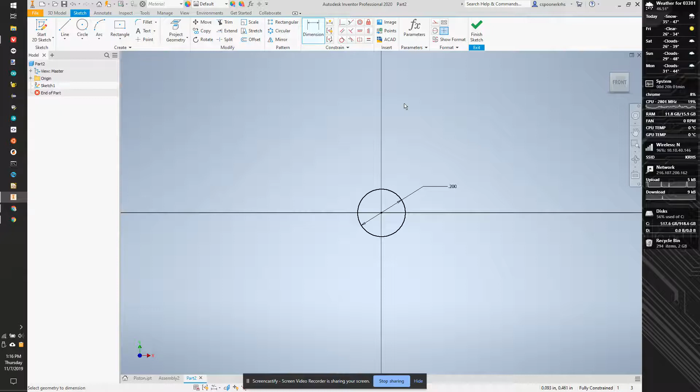I'm going to set this guy to 0.2. It's a fairly meaty piece of material, but it should be strong enough so we don't have to worry about it breaking. And I'm going to extrude this. I'm going to start by extruding it 1 inch. That might be too much, I'm not positive yet.

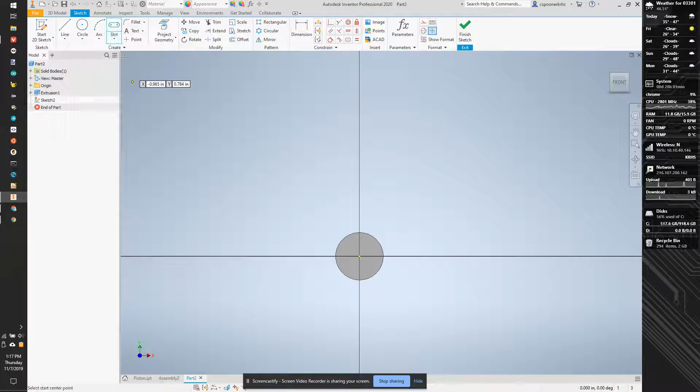I'm now going to start making the main lobes for the connecting rod. So this is going to be a center-to-center slot. I'm going to start here and go straight up. Nope, not center point slot, I want a center-to-center slot. I want to start here and go straight up, and I know it's going to click onto the edge of here. So this is in the same distance.

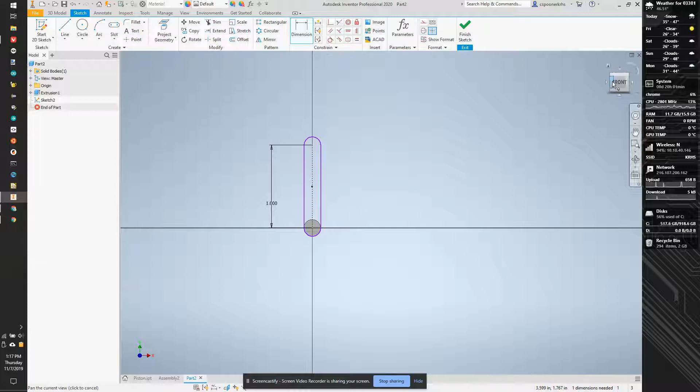And what we care about here is how far the pistons are going to go up and down. They're about 1 inch tall, so let's go with 1 inch. Actually, let's go 0.5 inches, so the total distance will be 1 inch.

And I'm going to make this 0.2. Actually, it makes it 0.2.

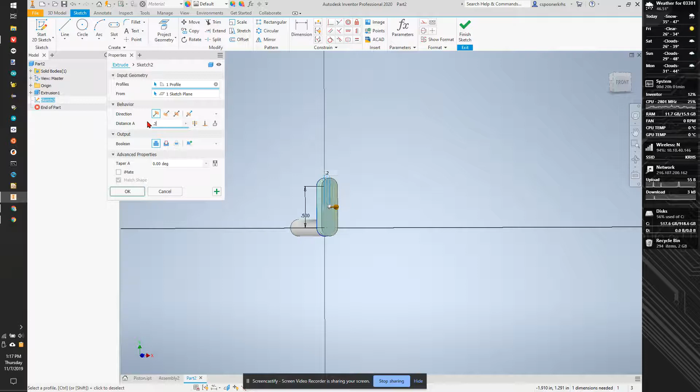And now the part, I have to go back and look at my assembly. We're going to go to inspect, measure, and I could usually just hit the M key. And I'm going to select from the XY plane to the XY plane.

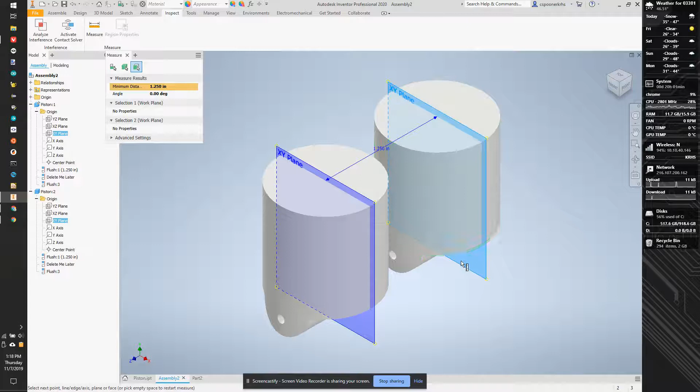It's 1.25 inches, so my center shaft from center to center is going to be 1.25. And the connecting rod, back to measure, I'm going to click from here to here, is 0.16.

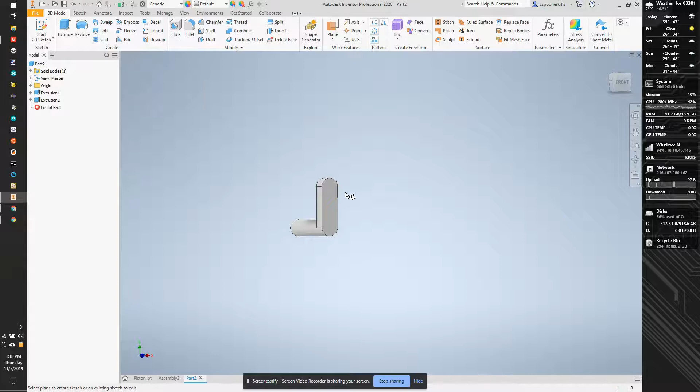So we're going to go over here and I'm going to extrude. I'm going to start a sketch on this shape here, and I'm going to draw a full-size circle here. I'm going to make sure it's connected onto here.

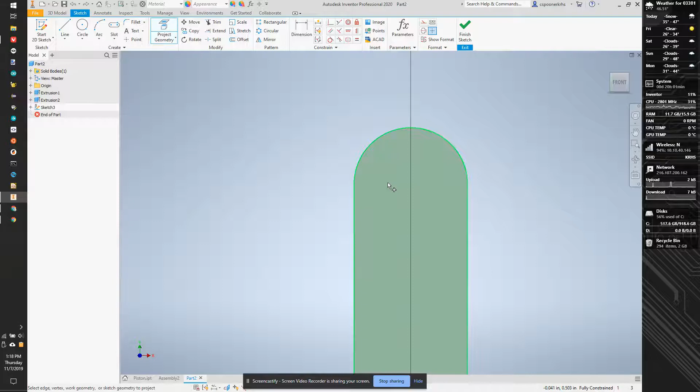Control Z. Let's project that geometry first, and then I can start a circle right on the end point, center point on center point, and this guy touches the edge.

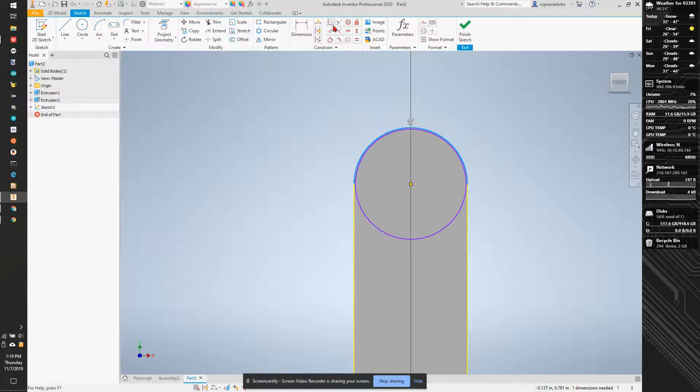Now this segment here, total distance from the center to the center is going to be 1.25. And I have a 0.15 smaller section here. So maybe what I'll do is I'll cut the centers out last. So let's just make this the right distance.

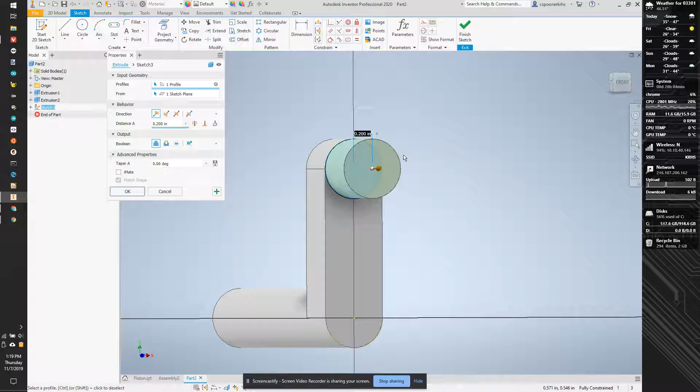So this should be 1 inch. So this is 0.15, or that's 0.2, plus 1.25 minus 0.2 star 2.

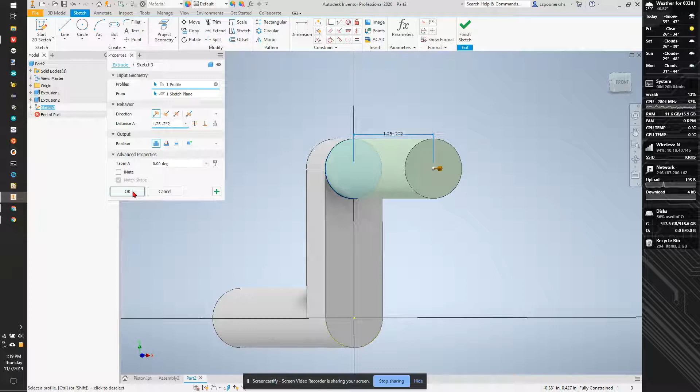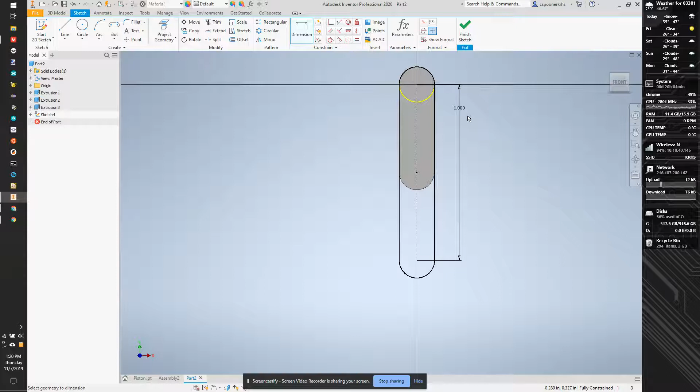And I'm going to start it. That means that if I start a sketch from here, I'm going to project geometry. I'm going to start a center slot and go straight down, and I'm going to click on this outside edge. And we're going to dimension this line here to 1 inch. And then we're going to extrude this 0.2 by 0.2.

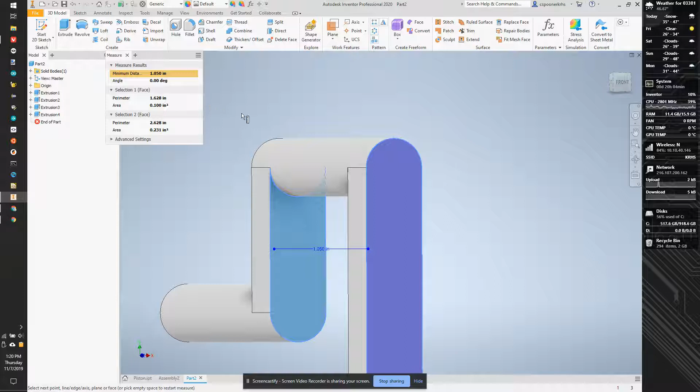Now if we dimension between these guys, if I measure by pressing the M key from here to here, we should get 1.050 in. So when I did this dimension here, I shouldn't have multiplied this by 2.

Now from here to here, exactly 1.25. So the center should be 1.25 apart.

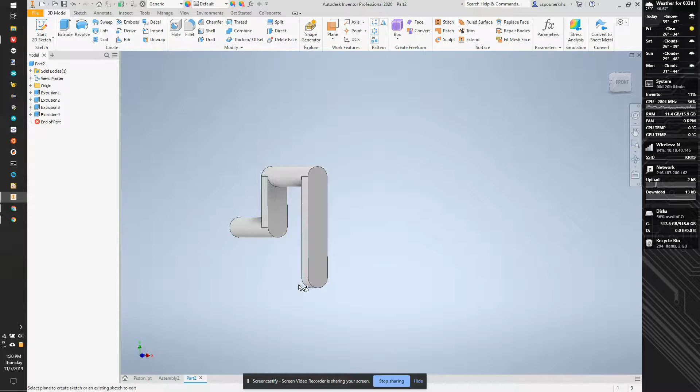I'm going to start a sketch here. I'm going to project geometry. I'm going to draw a circle. I'm going to make sure that this circle is on the thing, so it's the same size.

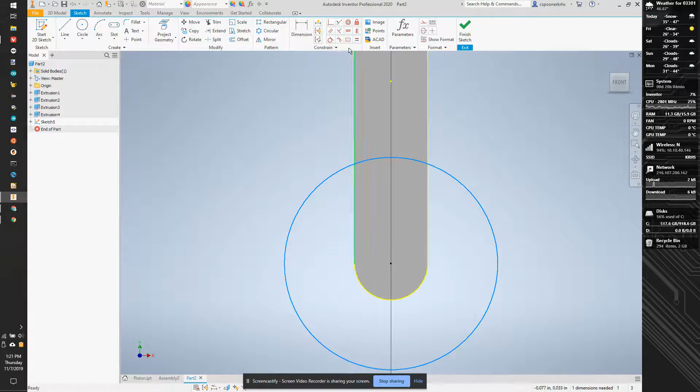There we go, I'm going to extrude this the same dimension. So this number here should be 1.05, 1.25 minus 0.2.

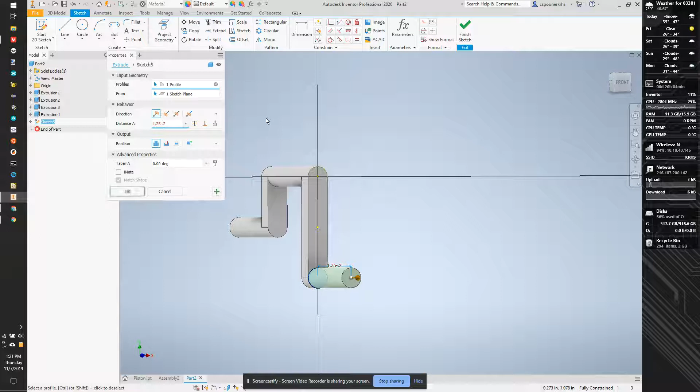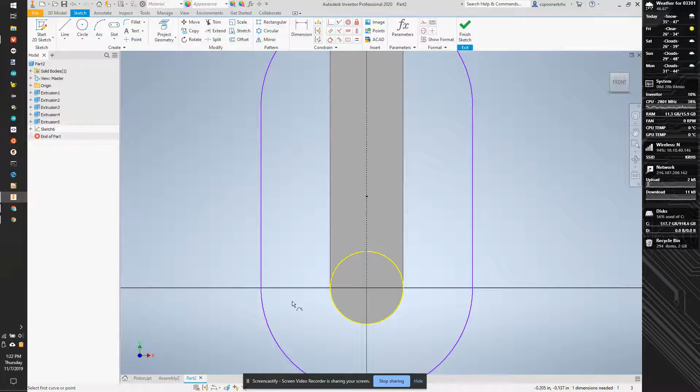I'm going to start a sketch on the end of this guy and project geometry. Then I'll draw a center slot, this time ending at the origin, making sure it clips on by clicking coincident with there. Then I'll extrude this 0.2 again.

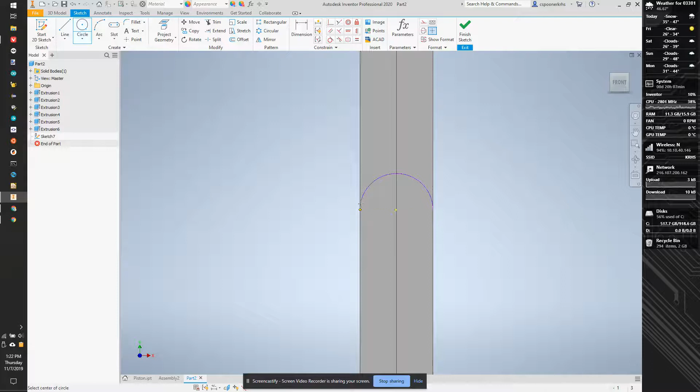I'm going to start a sketch on the end of this guy, draw another circle, and extrude this 1 inch. So this is our main crankshaft.

Now we also need to cut a groove in here that we're going to hook our connecting rods to, and this is going to actually print in place. So the first thing we're going to do is start a sketch, and we're going to create a work plane. We'll give ourselves a work axis that goes through this spot and this spot, so two work axes, and I'm going to do a sketch on this work plane.

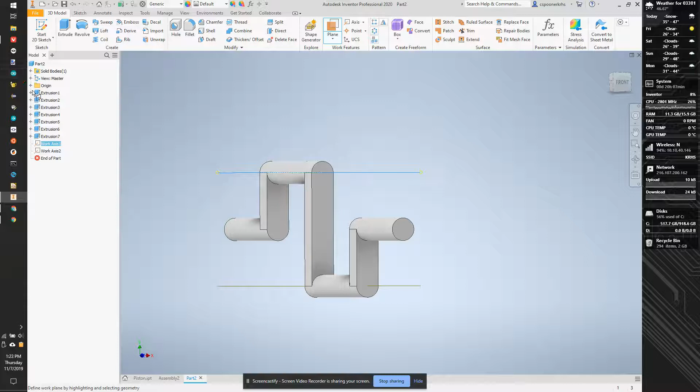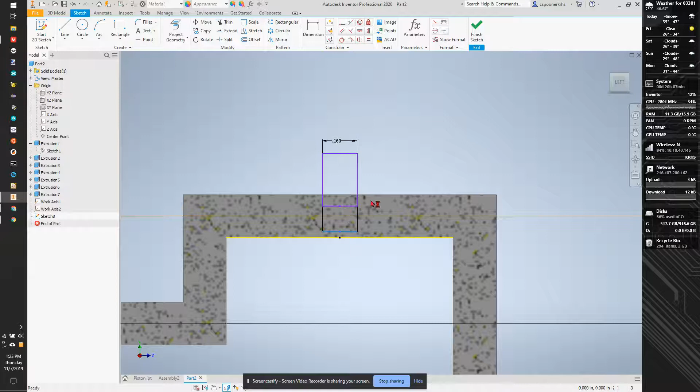I'm going to do a sketch on the XY plane, hit F7, and draw a rectangle above this line. Now, things I know with this rectangle: from this side here is going to be 0.15 plus 0.01. And I know the center of this line is going to be in the middle of this line. Finally, this gap here, I'm going to dimension from this point to this line, and we're going to make this 0.05 plus 0.005. So that's going to be our tolerance, our printing tolerance, plus the size of this diameter, plus this radius.

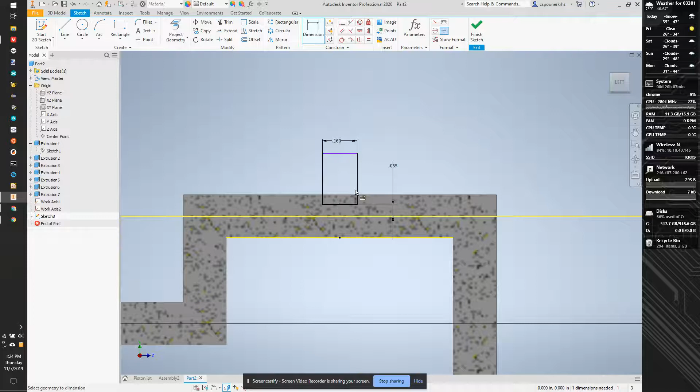So I'm going to revolve this shape up, R for revolve, about that line, and I want to cut. This is going to give me the profile where my connecting rod is going to set off of.

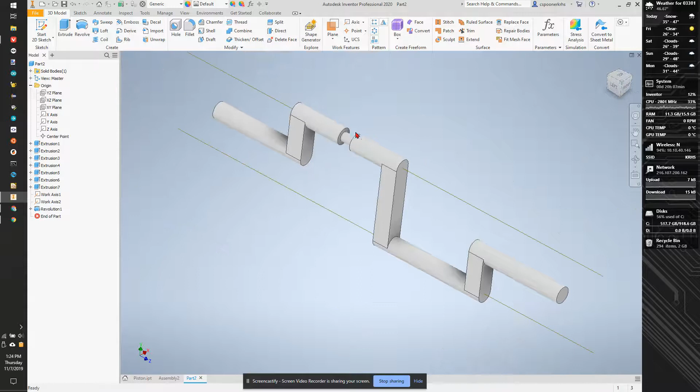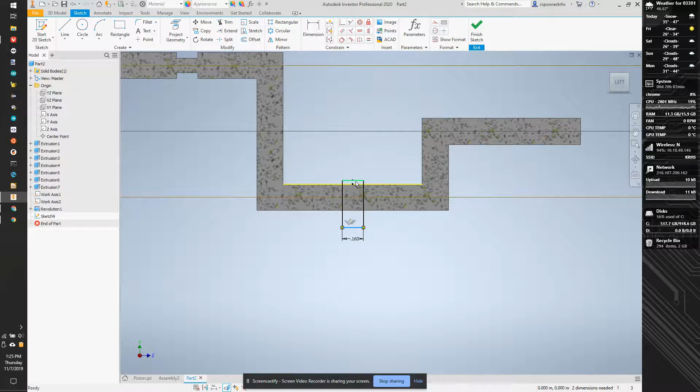And we're going to do the same thing on this guy. So we're going to start a sketch on the XY plane again, hit F7, and draw a rectangle. I know his center is - we're going to project geometry of this inner area and center it. This is going to be 0.15 plus 0.01. Then dimension from the axis to here is going to be 0.05 plus 0.005. And we'll revolve about this, making sure it's in cut.

And now we have our crankshaft. Let's save this guy and call him Crankshaft, and let's place him into assembly.

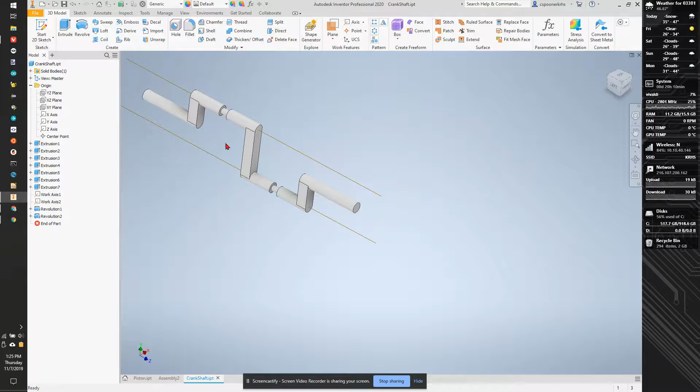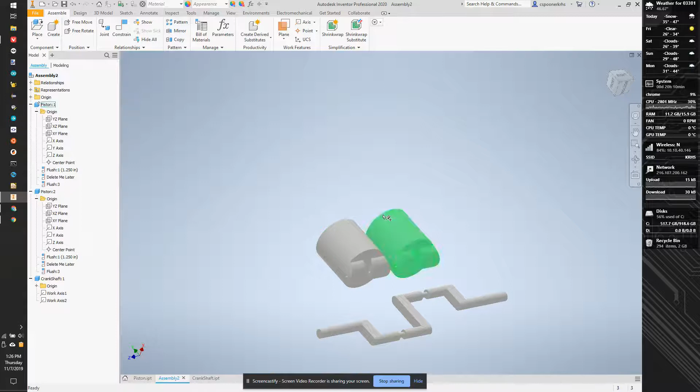So we're going to go to assembly and place this guy into it. Now I can go in here and hide his work axes, just turn visibility off on those so I don't see them. And now I know that this plane here should be parallel to this plane here. Apply. I'm going to pull this out of alignment.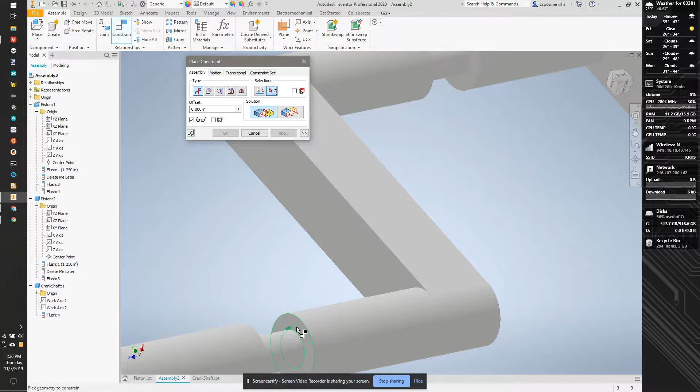And I know this plane here should line up with this plane here. Edit. That didn't change anything, but it did tell me that we're in the right spacing - that it's correct. So that lines up there, that lines up there. So now we have that in place.

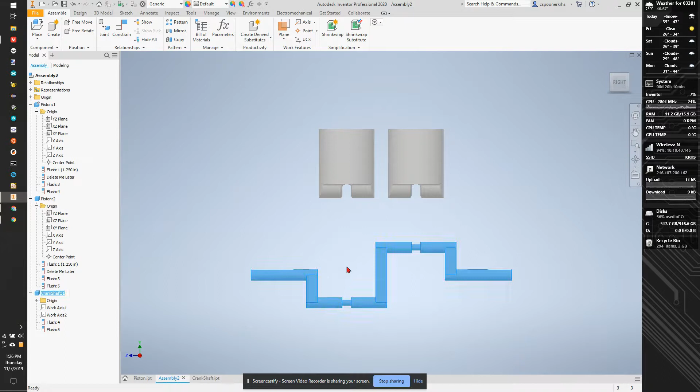Next step is we're going to build our crankshaft, and we're actually going to build our connecting rods - that's going to be built right into the connecting rod part, or I'll build them separately and we'll assemble them together. But this will actually print with the connecting rods as a single piece, and we'll get to that next.